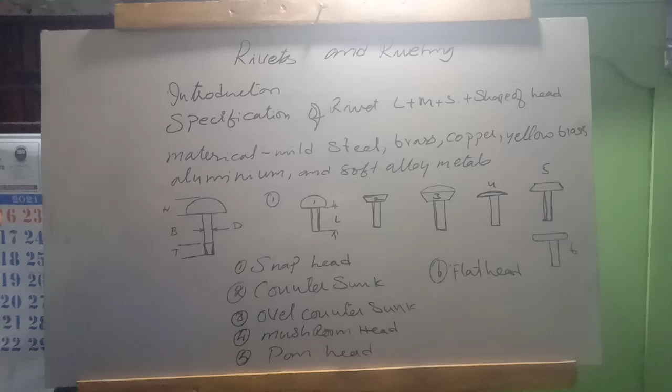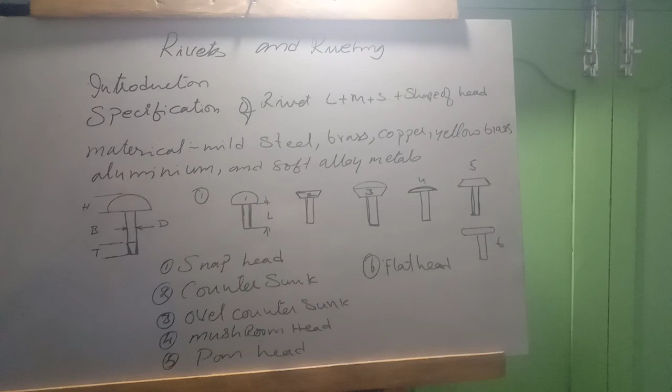The types of fasteners: permanent joints, riveting joints are there. So now we are learning the riveting joints for the sheet metal works. These riveting joints are used not only for the sheet metal works, but for plate work also. From thin sheets to thick plates, they are using riveting.

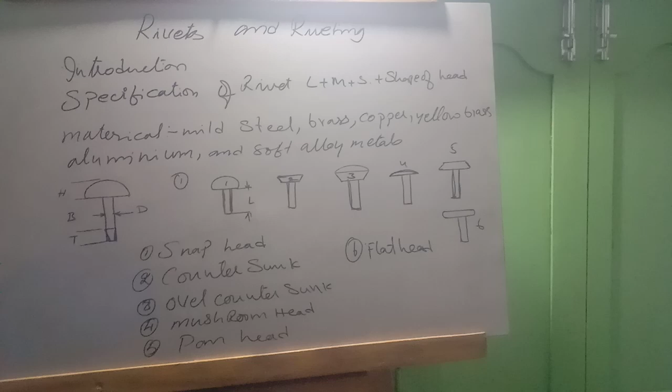From a bucket to a very big ship in the ocean, they make it with plates and do the riveting joint. Riveting joint is a permanent joint, as I told in the last class. The same way, for making sheet metal work they use rivets also, to join two or more pieces together.

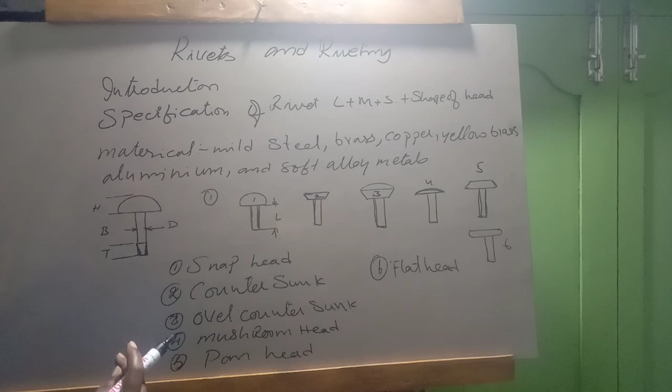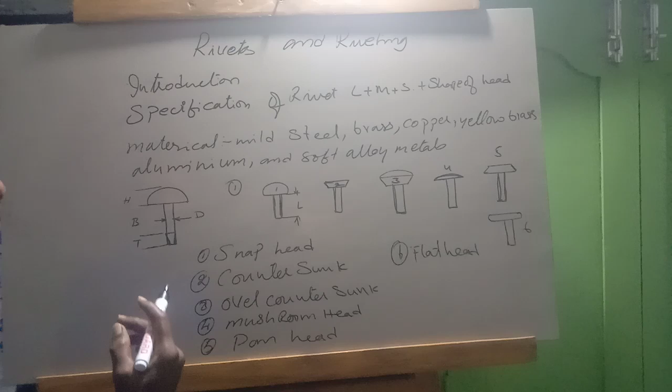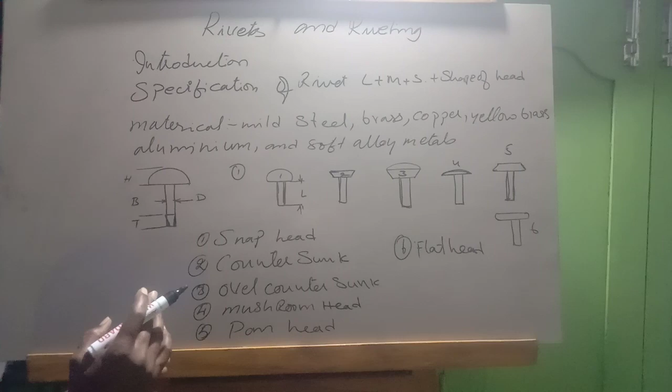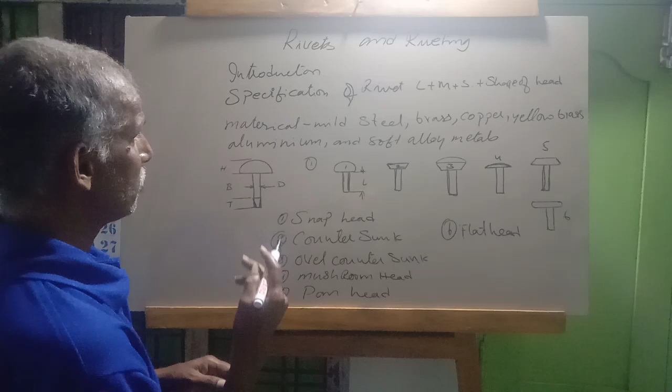In the last class we learned that sheet metal is joined with soldering and brazing. Where very tough work, hard work, and high temperature is there, soldering will not work. And with brazing, for some ornamental products, due to the heat the sheet will get distorted and go out of shape. To avoid this distortion, we are using rivets also.

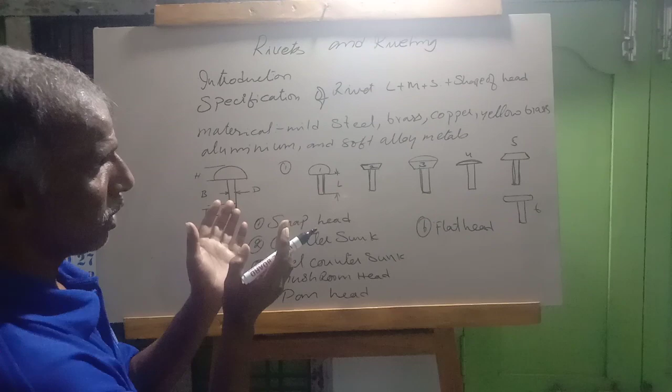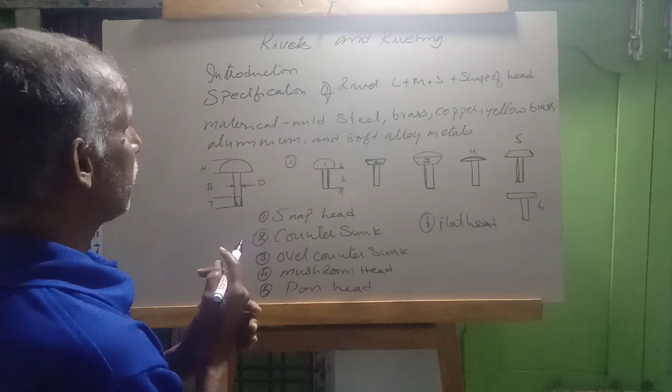Now, iron metal buckets. We have plastic buckets and metal buckets. The metal buckets are made with zinc sheets, formed in a conic taper shape, a frustum shape, and the two ends of the sheets are overlapped and riveted. For this bucket joint, the rivets are done very closely,

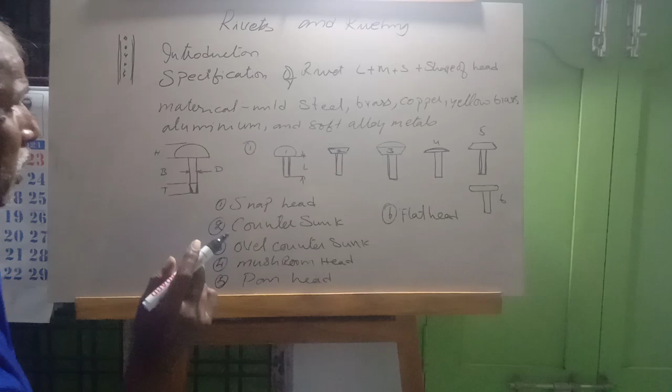because after riveting the water should not leak. After riveting, they apply filler metal. Sometimes they do soldering or put a filler like lacquer, different adhesives. According to the nature of the sheet metal work, we will use different types of metal rivets. Joining two or more sheet metals together by rivets is called riveting. Brazing also we can do, but the sheet will get distorted.

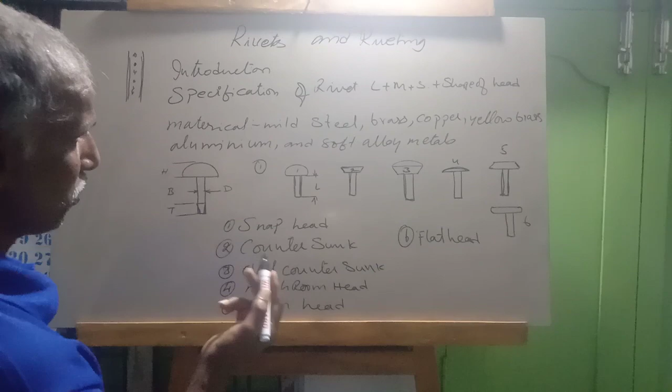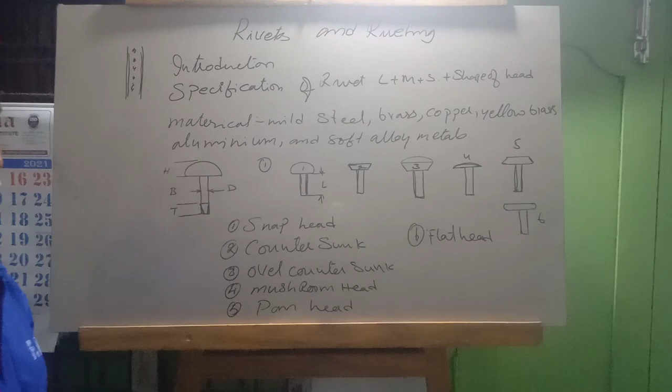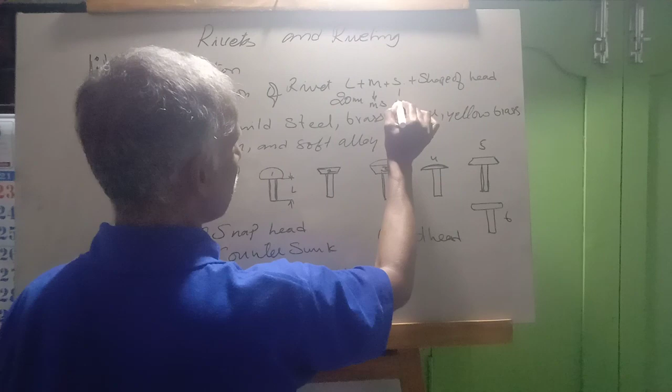Specification: to do riveting, we have to buy the rivets from the market. If you just ask for rivets, what rivets will he give? We have to give the specification for the rivet. First, length: 20 mm. Metal is MS. Size is 8 dia. Shape of head is snap head.

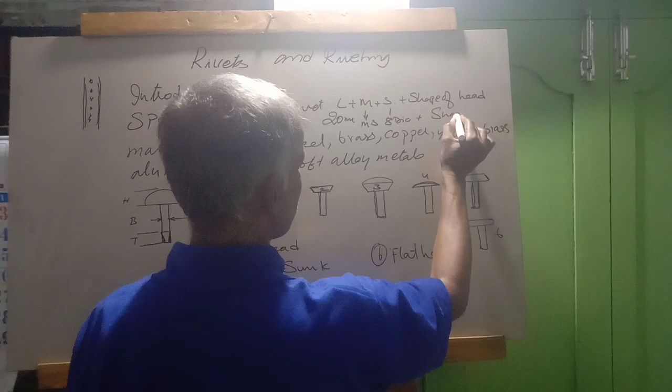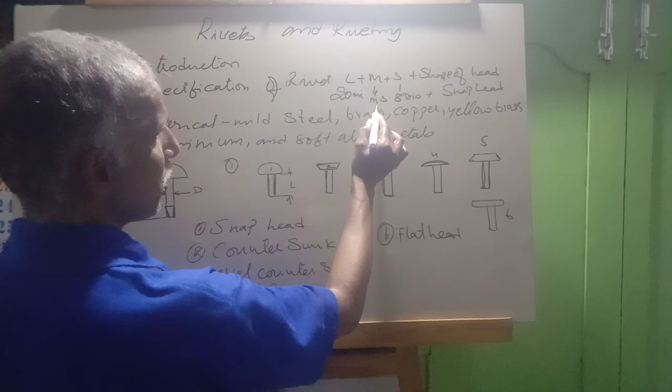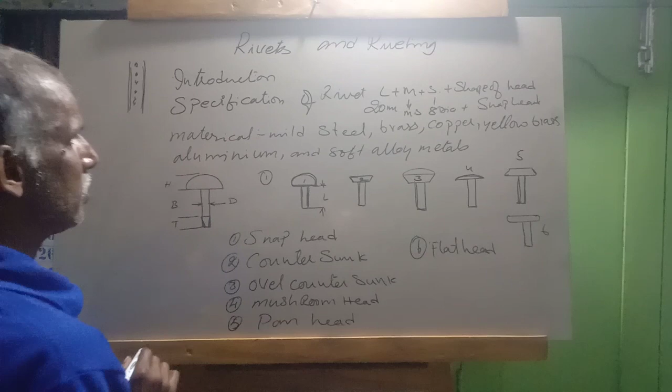When you go to the shop, you have to tell all these things. Rivets of different lengths, metals, diameters and shapes are available, so you have to give the correct specification: 20 mm, mild steel, 8 mm dia, snap head shape. This is the specification of the rivet: length, material, size and shape.

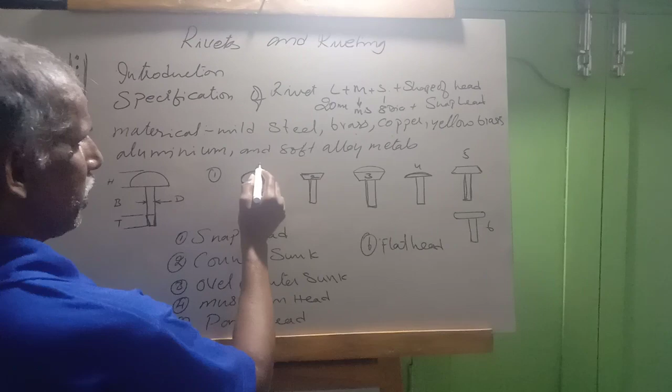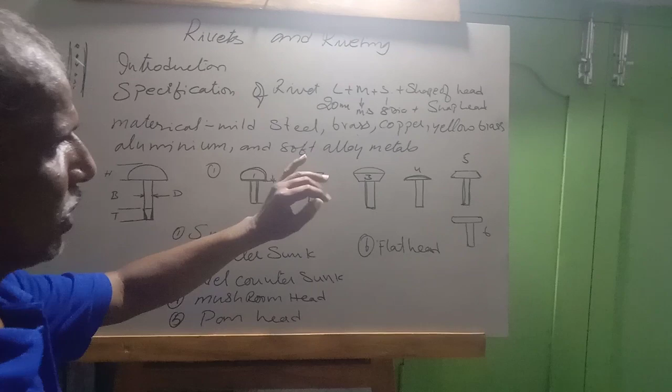Now materials. Rivets are made of mild steel, brass, copper, yellow brass, aluminium and soft alloy metal. Copper is a soft metal; brass is also soft depending on the combination of zinc and copper. If the zinc percent is more, it will break during riveting. So for a soft brass rivet, copper should be the base metal, more than 60 or 70%, remaining zinc.

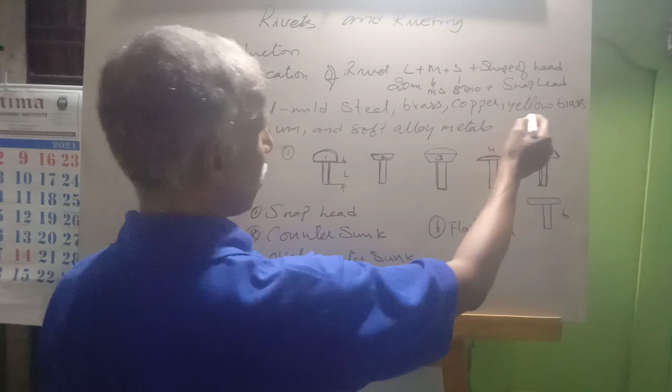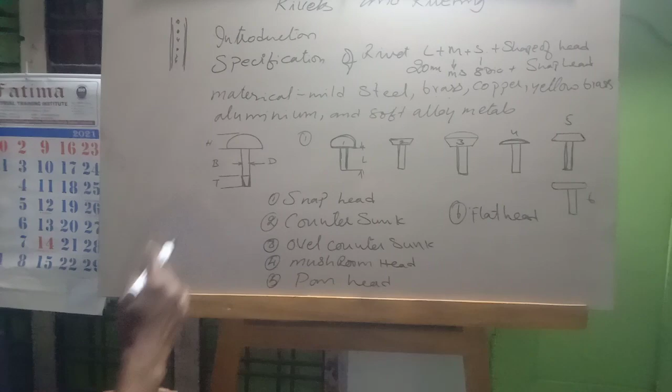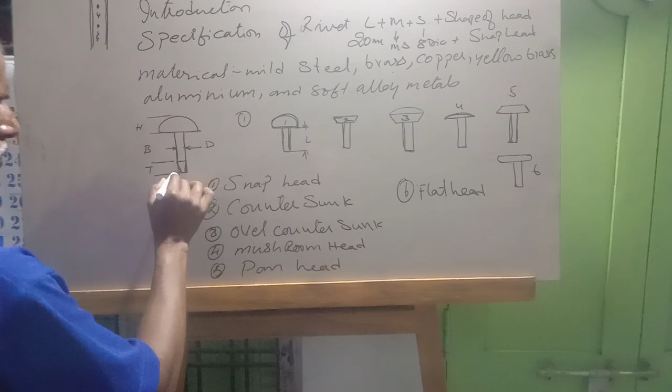Different categories of brasses, like yellow brass, are available, listed by their composition percentages. Aluminium rivets and soft alloy metal rivets are also available. According to the nature of work, we select the material. Now we'll see what a rivet is. A rivet is a cylindrical rod having a head shape at one end.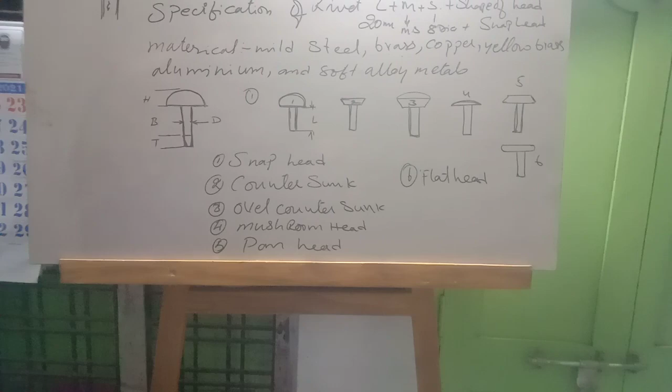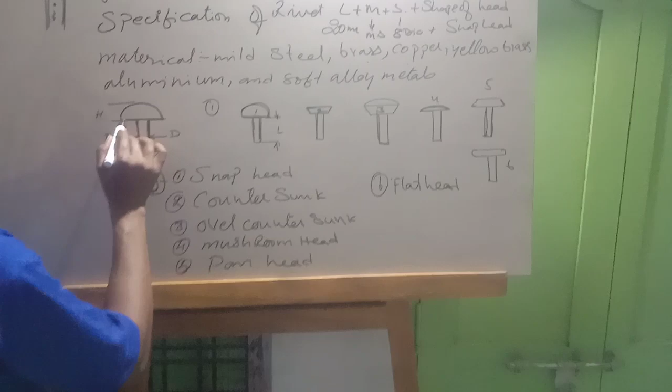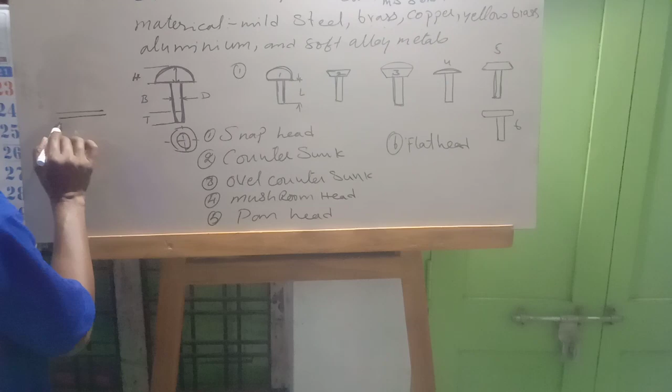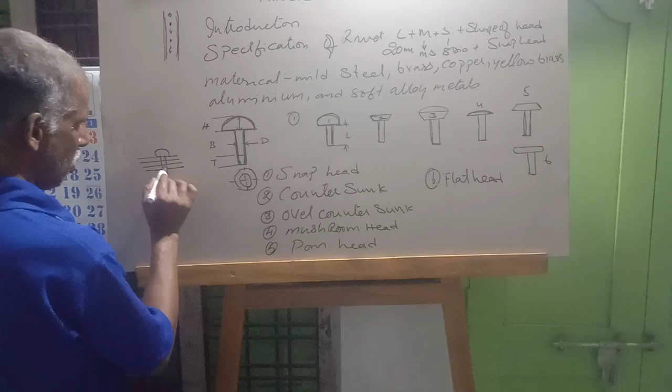All of you might have seen this: a rivet, a cylindrical rod, in cross section. The top end is called the head, which has a round shape. From the shank end to the outermost point is the head length. This is the body. The body is the portion occupied by the sheets you join, say 3 sheets.

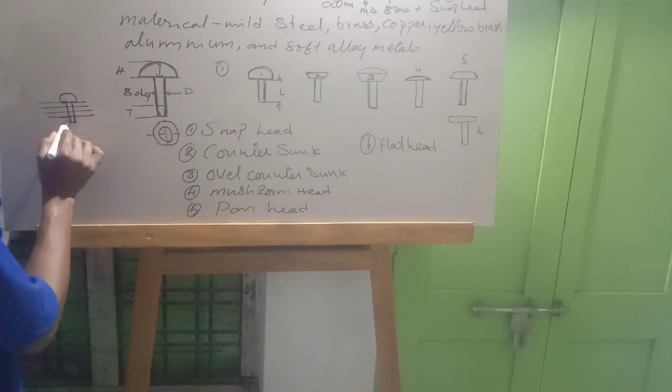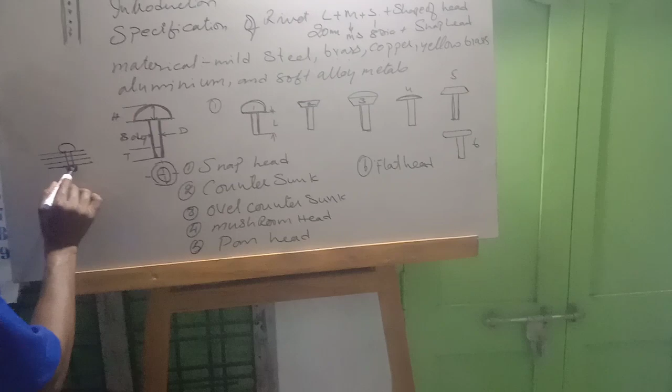The remaining length is used to form the head, like a snap head, by riveting with a ball peen hammer. You have to use a ball peen hammer only. So the length through the 3 sheets is called body, and the remaining portion that we form into the head shape is called tail. Tail. Head.

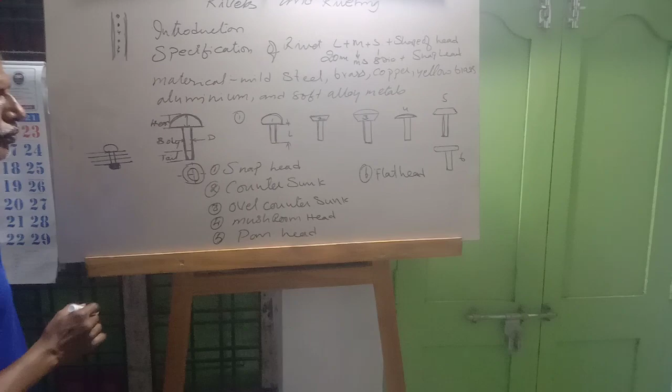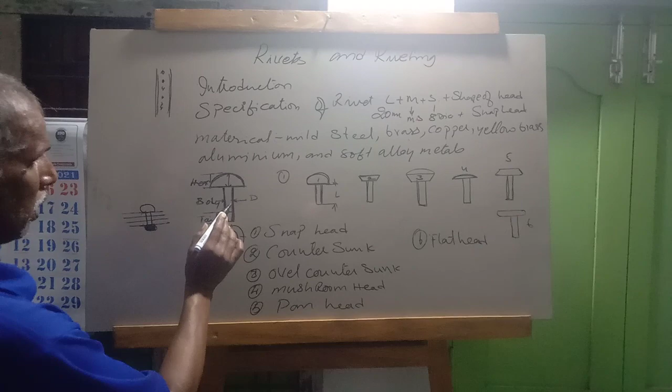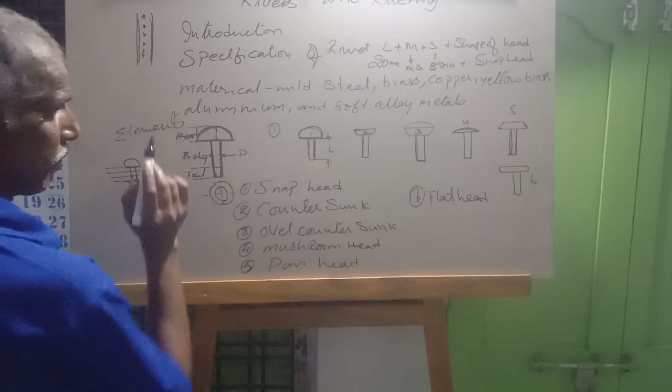So these are the elements, not parts. In your book PDF, they call them the parts of the rivet. We should not say parts of the rivet, because a rivet is made of one single material, not separate parts. So we should call them elements of a rivet.

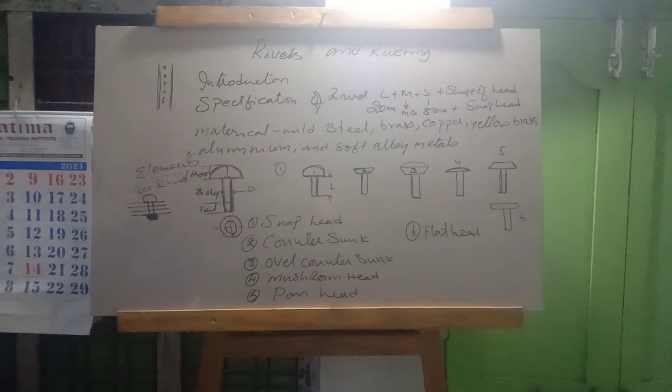First we will call this the shank or body as a whole. For example, here is a snap rivet: head and shank or body. Here is the head, this is the shank.

When you use 2 sheets, after using them, the remaining portion is called tail. The shape of the head in this shape is called snap head.

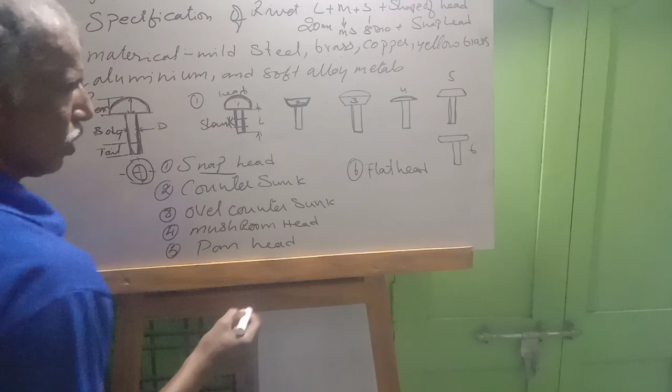Now countersunk. This is a countersunk head. If the rivet is in this shape, it is called countersunk, used when joining 2 sheet metals.

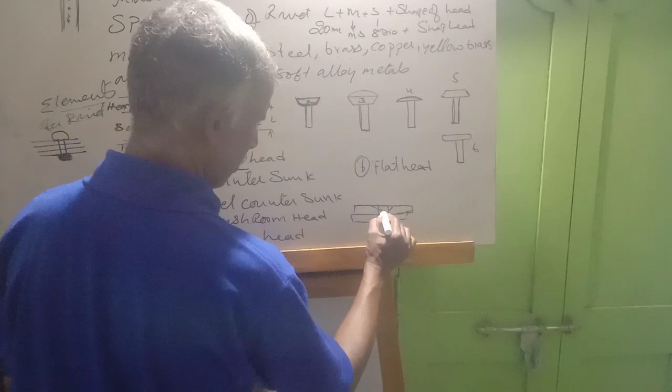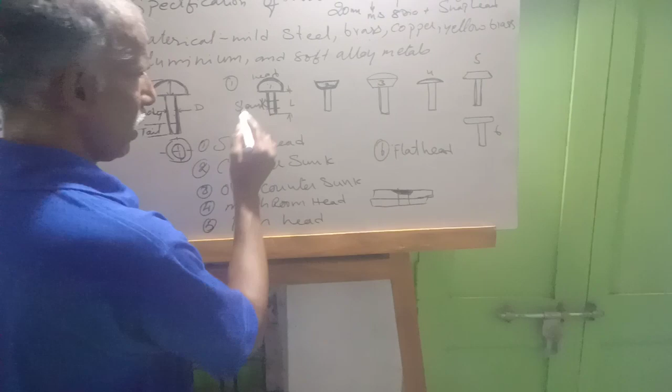The rivet will sink into the sheet. Whereas with the snap head, the head is projecting out, the other end what we are riveting is projecting out. The projecting round ball shape is called snap head. But here, what we call countersunk head key means the head will sink into the sheet.

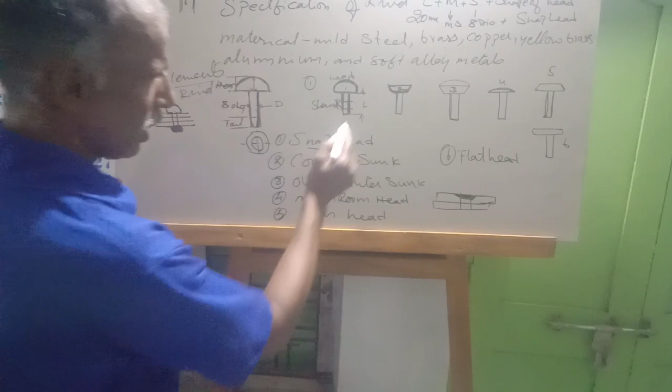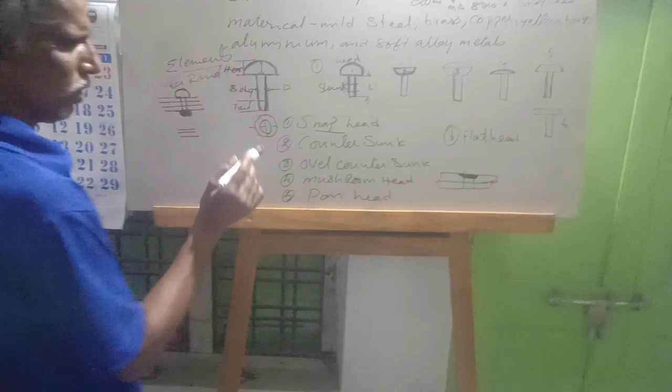Generally the sheet is a very thin sheet metal, so countersunk is not used for such sheets. We can use it to join, but after projecting out, it will have pointed edges and corners, so it will not look nice. It's only for sinking. When thick sheets are there, the top portion is made countersunk to accommodate this taper into the sheet.

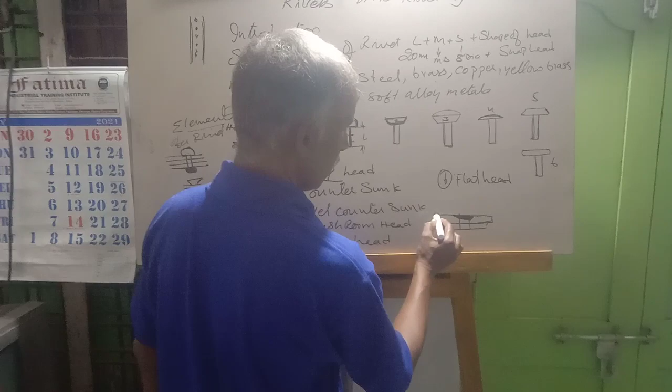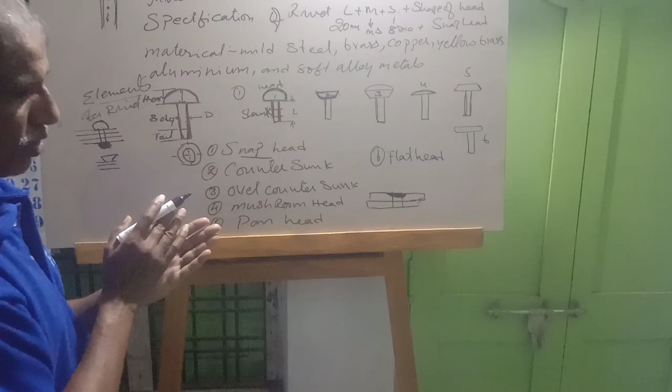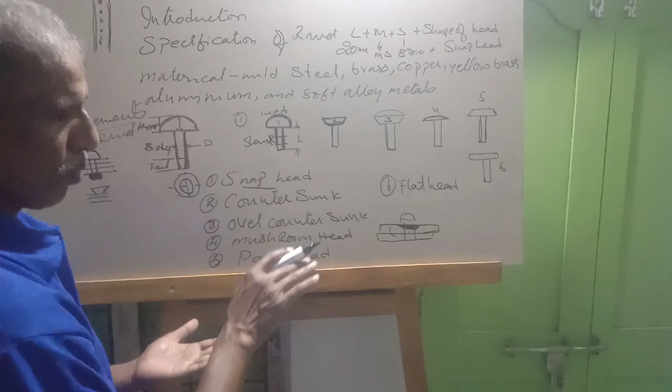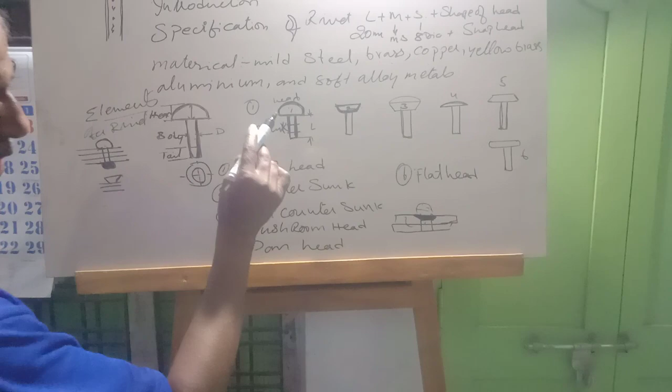Countersunk is used where, in machines, the top sliding or rotating portion does reciprocation on another surface. When two sheets are joined there, if we use a snap rivet, the projection of the snap head on top will not allow the machine's moving part to reciprocate. In such places, we use sunk head rivets, since different heads of rivets are used for different work functions.

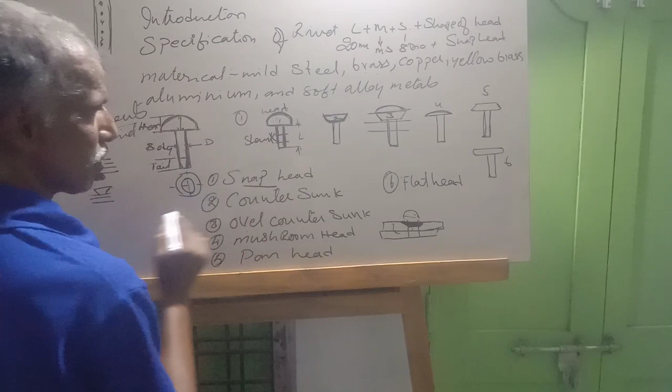Now the third one is oval countersunk. Most of this portion is countersunk into the sheet, and a small portion is on top in an oval shape. It's not like a snap round, just a raised portion like this. This is called oval countersunk.

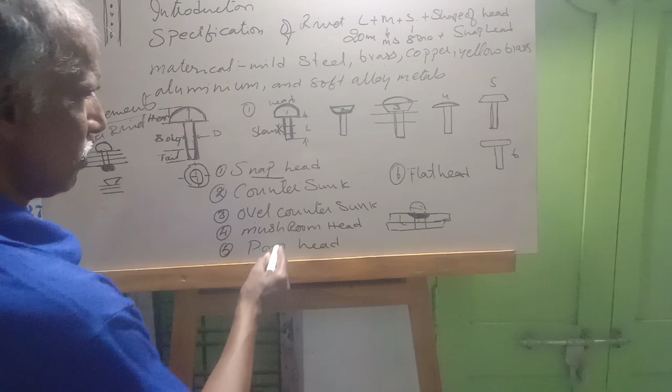This is mushroom head rivet. This mushroom head rivet has a small raised projection, and the head will project out of the sheet.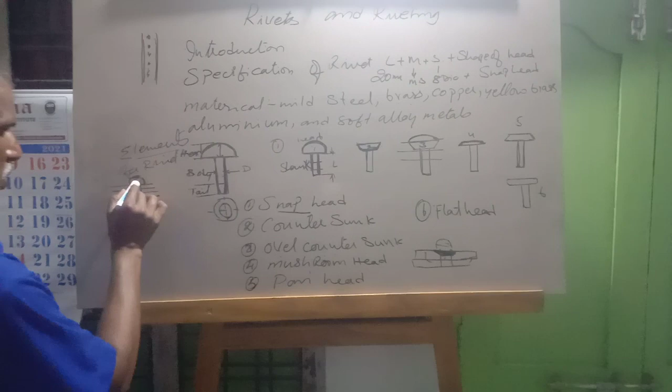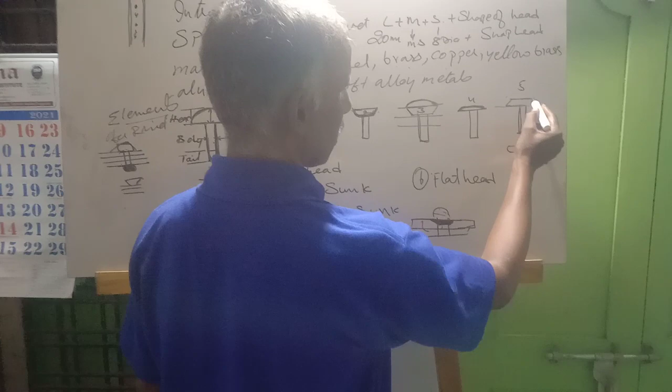Pan head - this is also a rivet where the head will project out. Project out means this is the inverse of countersunk, which has points on top. This is inverse because it will not have points that look shabby. The taper is there, and the bottom portion rests completely on the sheet. If the sheet is not countersunk, the bottom portion is slightly raised and the top portion does not rest properly. So according to the work system, we use different head rivets.

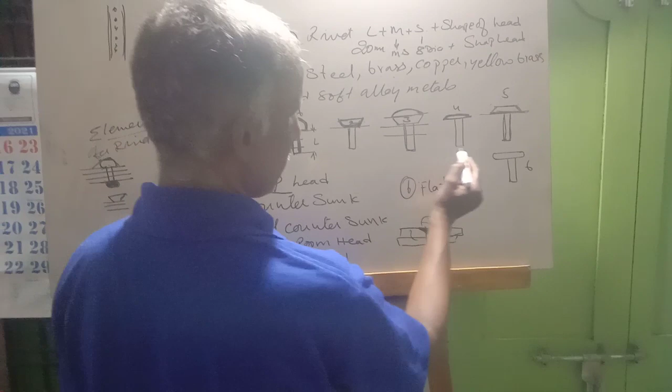Now pan head rivet, and this is flat head rivet. On the top portion, the rivet is in a flat shape, same as a regular rivet. This is generally used for riveting almaras - sheet metal works where they make boxes, almaras and doors, they'll use the flat head.

These are all the rivets and riveting types. Now riveting is done to join two or more parts.

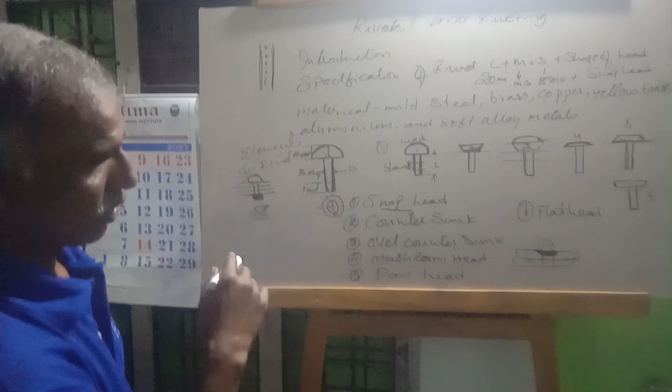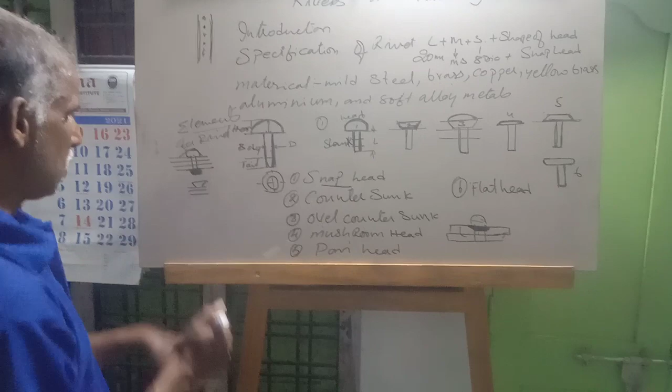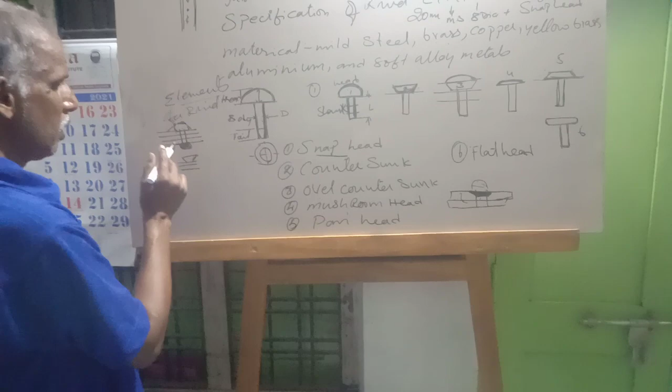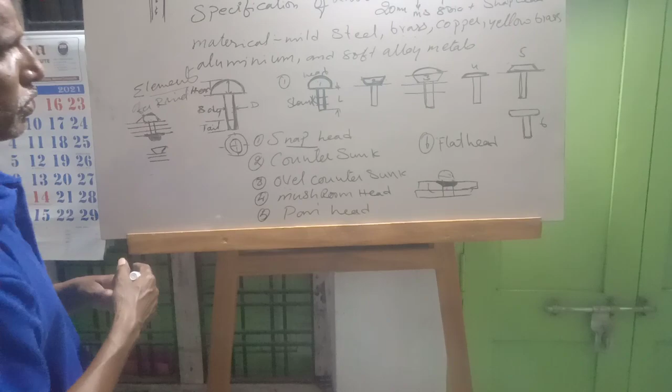This riveting is called a permanent joint because, as I told in the soldering lesson, if you overheat a soldering joint, the lead and tin alloy solder will melt, flow and come out, and we can dismantle the part. Whereas with a rivet, when you want to dismantle it, the head or the tail portion made into the rivet head has to be ground and removed. When you grind and remove it, you lose the riveted material. Sometimes the sheet gets damaged, and this rivet cannot be used further because this joint is a permanent joint - if you want to dismantle it, it won't work again for joining. That's why it's called a permanent rivet joint, as I told in the last class.

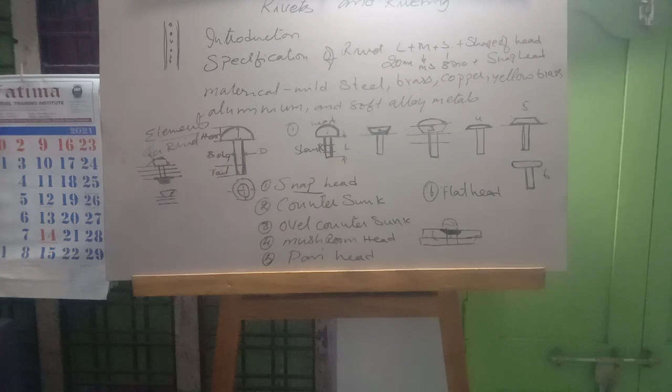These are the different shapes of rivets. Other than this, some more different types of rivets are also available.

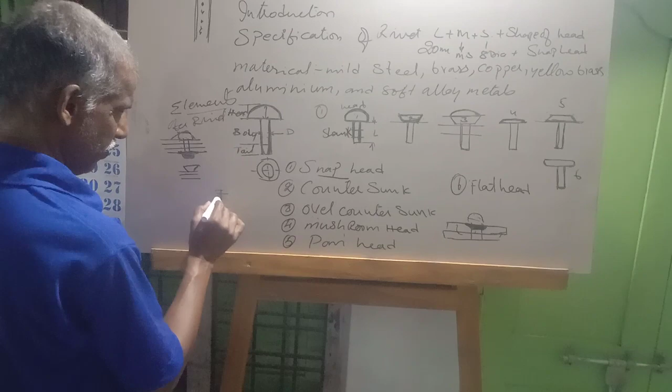Tubular rivets - these are used in body building of vehicles. For example, if you take a bus, the body is made with a light metal called aluminum, and the sheet is joined with tubular rivets. The sheet which is joined, that rivet will have a hole. Further along in these classes, you will get to tubular rivets also.

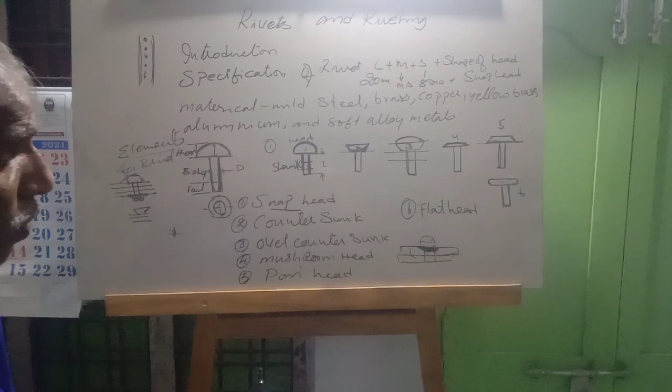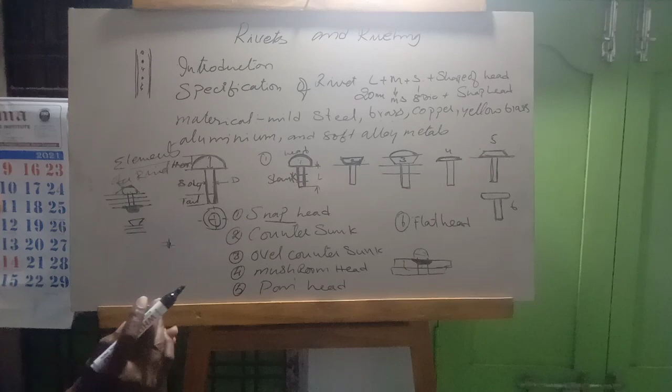This is riveting. Riveting is done in different methods - by manual, by machine, and there is cold riveting and hot riveting. What is cold riveting, what is hot riveting? This topic is for sheet metal work only, but hot riveting is used when thick plates are used. This is riveting and rivets.